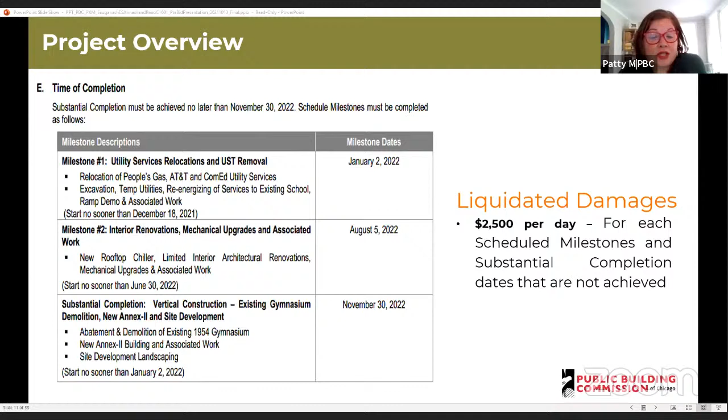The availability of the documents are on the Crossroads Print and Technologies Plan Room. The printer contact information is located here on the screen. The contact name is Christy Weber, telephone number as listed there. If anybody has any questions downloading the documents or is unable to reach Christy, please send me an email.

The assist agencies also have access to the documents and are able to assist you with viewing or downloading.

The tech review is immediately following this pre-bid at 11:30, and there is no scheduled site visit. But notwithstanding, bidders are advised that access to the school is restricted, and failure for bidders to become familiar with the project shall not relieve or alter the bidder's responsibility for completing the work.

Requests for information - I've received a number of RFIs to date on the project. Please ensure that you submit them to my attention. We are currently working on an addendum expected to be issued soon, and we want all questions in by October 19th, please, by 4:30 p.m. Please make sure that you identify the project name in the subject line or somewhere in the body of the email.

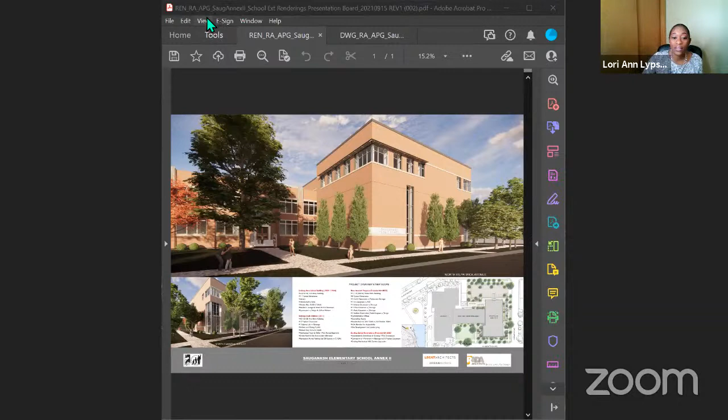Great, all right, thank you, Lori. You know, actually, sometimes I don't share the full screen because it doesn't allow me to look at my notes in this little small laptop. So I'm going to try and unfortunately keep it this way, and then we can work through the rest.

So, Kerl LaJeune, Deputy Director of Planning and Design. We've been working on this project for the last few months.

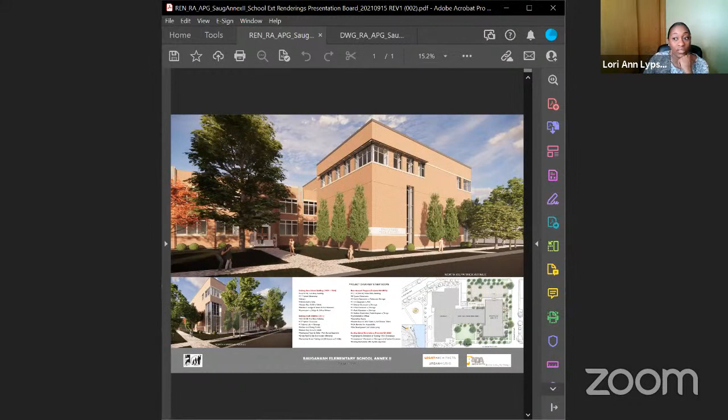I know you can't see your notes, but it's hard because we're streaming. So can you please go to the other part? If you need to go back, we can do so. We're streaming, so when you have half of a screen, it's difficult for folks to see. Is this visible? It's very hard to see. Well, that's going to be a challenge because I only have one screen. So, okay, we'll try and figure something out. I'll have to use my phone in the interim because I think my notes are there.

As mentioned, we've been working on this project for a few months. It's been very exciting knowing that this neighborhood is part of the Sauganash Historic District. It incorporates the existing school building that has been there since 1929. The site itself, the entire campus of the school, has gone through quite a bit of work since then—shortly after, in 1954, an addition was done to the north end of the existing small building. Just north of that, they added two bays to the existing school, as well as a new gymnasium, which was part of the new program.

Thereafter, in 2011, PBC, along with CPS, put in the Annex 1 addition to the south of the existing school, for additional programming, classrooms, and other specialty learning spaces. Then in 2017, south of that annex, work was done for a turf field that encompasses basically the southern portion of the site, of which our scope will not go into that zone, nor are we doing much work in the existing 2011 annex to the south.

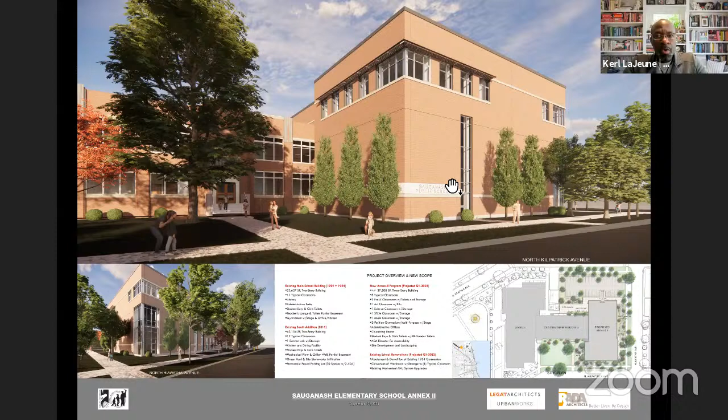It is facing Kilpatrick. There are some salvage components, like the stone Sauganash Public School sign from the existing gymnasium, that are getting relocated here. What you're seeing is a design that's sympathetic to what was done in 2011—some of the same motifs in terms of the brise-soleil, window proportions, the gymnasium, and the curtain wall are all from the 2011 addition, done really as bookends to the project.

Looking at the southeast side on the corner, you're seeing the new proposed annex to the north, the existing main building in the center, and on the southern end the 2011 addition. The field is a little bit below, south of that—that's the turf that was done as part of the project.

I'm going to step out of this for a second and focus on some highlights. It is part of the Sauganash Historic District, established in 2010. The school, however, is not on the National Register of Historic Places, considering all of the additions and other changes that have been done.

The constituents for this project have had quite a bit of community involvement. Principal Christine Munns is very active with the project and has seen quite a bit of the changes. The 39th Ward Alderman, Samantha Nugent, as well as Congressman Mike Quigley, have been involved in early parts of the project, and there is a Sauganash Community Association that acts as the LSC for the neighborhood and has been very active. So this project is on the radar of everyone, community and stakeholders, and we want to make sure we're providing this wonderful opportunity and increased growth for the school.

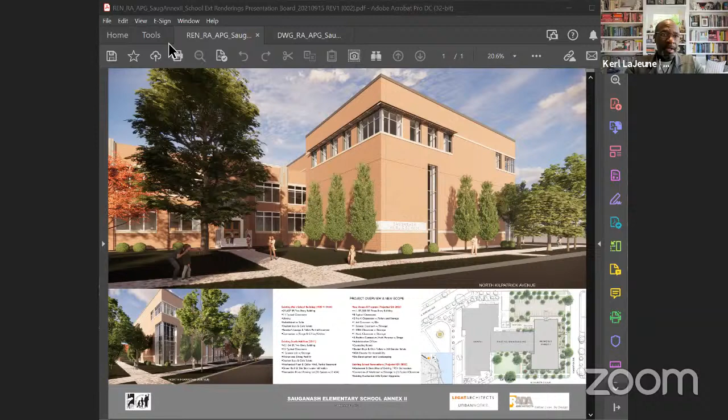I think with that, I'm going to stop there. I think the majority of the information here, understanding the scope for both the new proposed work and the impact on the existing school, are in the documents.

We have the plan schedule in order to handle the limits of construction, which encompasses the existing parking lot to the west, the location where the gymnasium to the north will be demolished, up to Hiawatha, which is the street that faces north and runs east-west, and then a portion up to the front of the building on Kilpatrick, which will be the extent of the annex abutting within the setback on Kilpatrick and the sidewalk, as you see here in the elevation.

So the construction limits are fairly clear in the documents. Coordination with the school has already been done to understand the impacts and restrictions for them as they go through the process. The phasing plan will talk about scheduling related to work inside the school building that will happen as summer critical work in order to not disrupt while school is in session. The remainder of the work on the annex goes on for the entire year until it's delivered for substantial completion.

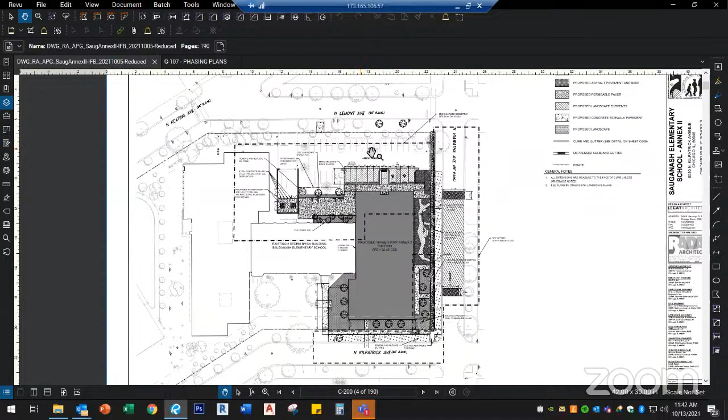All right, so special things about this site, there are two I want to highlight. One is the parking, the area in the parking lot. What we need to do is remove the existing pavers and landscape islands that are currently there, and remove the stone from the detention underneath. This is to allow the relocated electrical feeds and communications feeds to be installed underneath this area, and I'll show a detail here in a minute of what that will look like. So these feeds will go underneath the storage stone, and then after they're installed, we'll rebuild that part of the stone storage for the detention and the pavers on top with the layout that you see here.

The second part is, and I think landscape will probably go into a little more detail, but the area just to the north of the school is being called the Pollinator Garden. There's also detention storage underneath this area.

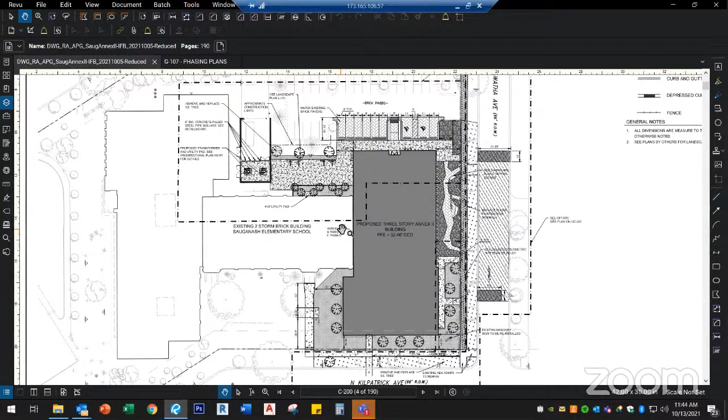I think landscape will go over the surface features. I'll show a detail in just a minute of exactly how those features work with the detention underneath. I think site-wise, that's all I had at this time. If you want to go to the next sheet, the C300 sheet.

If you go up to the parking lot area, you can see the utilities I was just talking about. These will be installed underneath that stone area, and again I'll show a detail on the next sheet.

That just shows exactly what we're thinking on that. If we go down to the south, this is a unique stormwater system, as the underground detention vault is going to be underneath the building footprint. Structural might note some different things in plumbing as well, but the storm trap vault, or detention vault, is shown underneath the building footprint. That is correct, so I know there might be some questions on that.

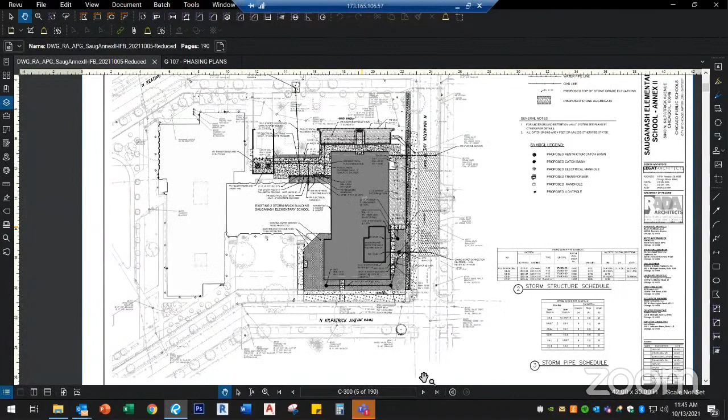I think that's it for these utilities. If you go to C600 or 601, there you go.

The detail on the left is the Pollinator Garden detail. You can see there's pavers, landscape up above, and wherever there are pavers, we've got a stone column that goes down into the stone storage area below. Then there'll be a perforated PVC under-drain to take any of that water. Now if we go to the detail on the right...

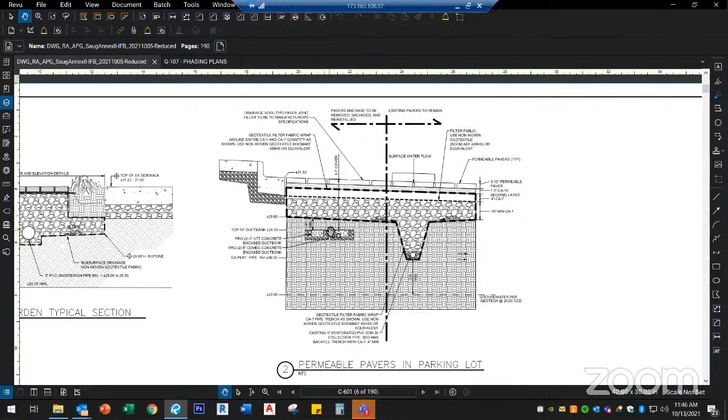The area to the left of the dashed center line is the area we're going to be disturbing. As you can see, we've got our two utility trenches underneath the stone area. Anything to the right of that dashed center line is existing to remain as is, and we are not touching that. So I think those are the special items that I had for civil.

Okay, TGDA is the landscape architect and can review the landscape highlights for the project.

Hi, this is Ben with TGDA Landscape Architecture. For the protection and removals, we are showing a number of tree removals with an X, and if the tree isn't to be removed, it's to be protected. We're showing landscape protection fence at the critical areas where trees need to be protected in their root zones.

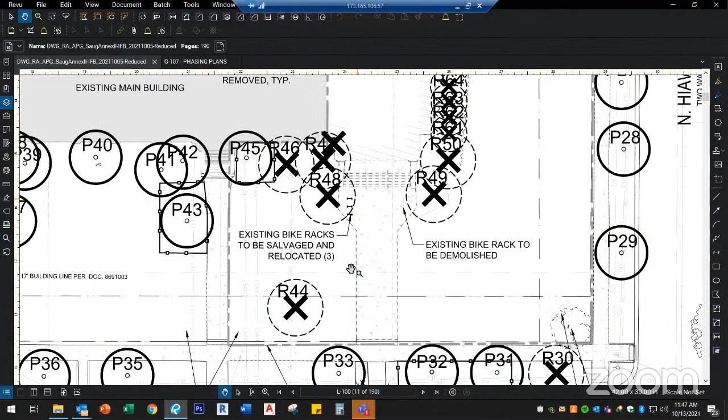One thing to note on that plan is the salvage of the boulders in the current bioswale at the parking lot and the stainless steel rail that protects that planting. Those things will be reused in the project, as well as a few bike racks at the other end of the building. So the boulders will just need to be tagged and set aside for the build out of the landscape.

For the next sheet, the plan sheet, as Andy was saying, the feature here is the Pollinator Garden, which consists of permeable pavers, landscaping, trees, perennials, shrubs, the salvaged boulders, a couple of benches, and a dry erase and chalkboard—kind of an outdoor classroom.

Then it's surrounded by fencing with a couple of openings, and there'll be two gates, one entering the property and one entering the Pollinator Garden.

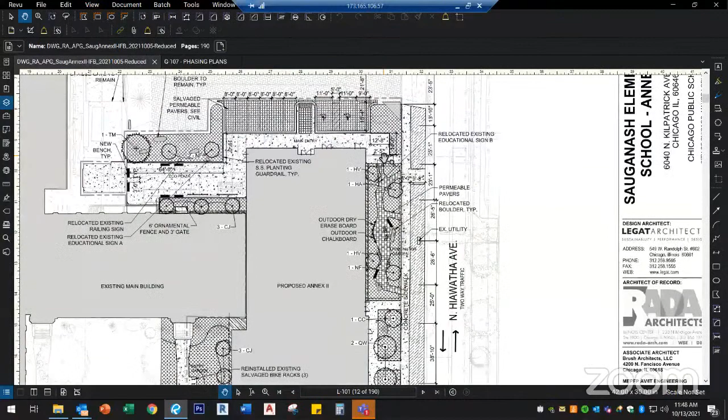Other items on this plan are tree, shrub, and feature perennial gardens, and adding in ordinance trees. Up here in the left-hand corner, we are showing this eco plaza. We will need to add some soil to the parking lot planter at the bottom end, and then replant that entire planter. Below that, along the building, there's a new planter with a 6-inch curb with a few trees, perennials, and shrubs.

I think that pretty much can wrap up the site plan. Then we have detail of the perennial layout, the soil plan, and the dimension plan for the perennial garden.

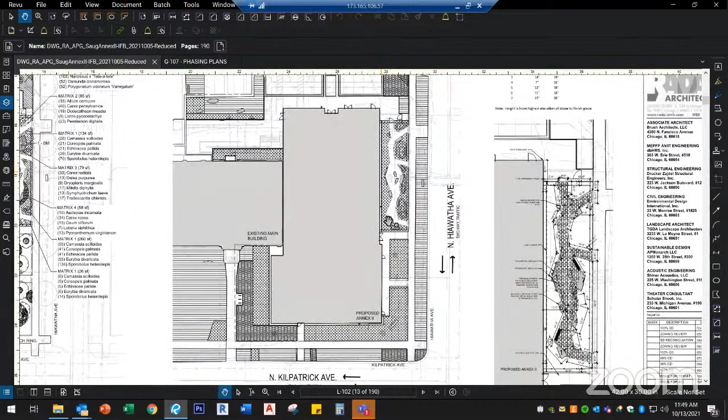The soil plan shows the depths of planting soil needed per bed, and the planting plan shows an extensive perennial layout. We intend to be on site for the perennial layout.

The dimension plan for the Pollinator Garden also shows where the salvaged boulders will be placed, on the other side of the sheet. We intend to be on site to assist with placing those boulders as well.

That's it for that sheet. Then we just have the standard details. We are salvaging material, and those details are shown, as well as new items, including the chalkboard, dry erase board detail, depths for soil, and general boulder layout detail.

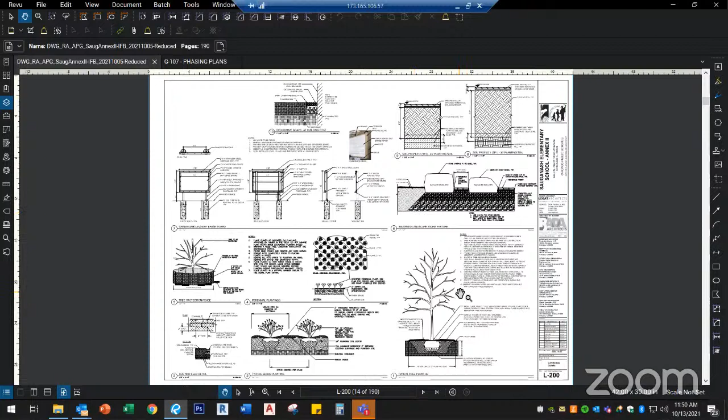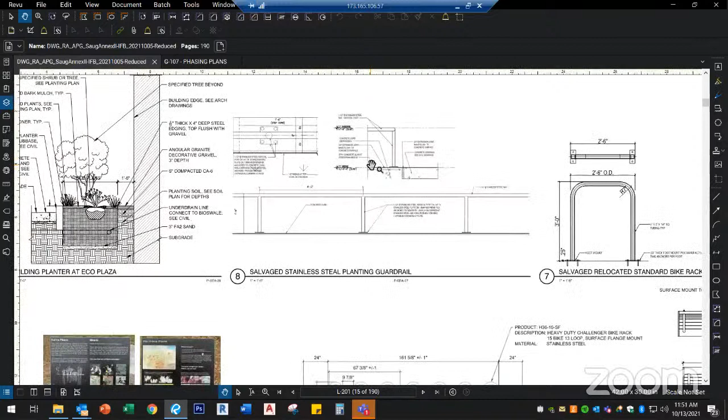So we are salvaging some signs, and that will need footings. At the top of the page, we have this salvaged stainless steel planting protection rail that will need to be reinstalled. We don't intend to weld the corners of it, but whenever it takes a turn, it needs to terminate into the ground, as that detail shows.

Okay, thanks Ben. I think that gets us through the landscape. Craig at DZSE is going to take us through the highlights of the structural.

Craig, are you with us? Is someone else able to cover Craig's portion? Is DZSE on? Yeah, Carrie Warner here from DZSE also. I'm checking with Craig, I think he just lost connection, so I can start into this if he comes back on, we'll have him continue.

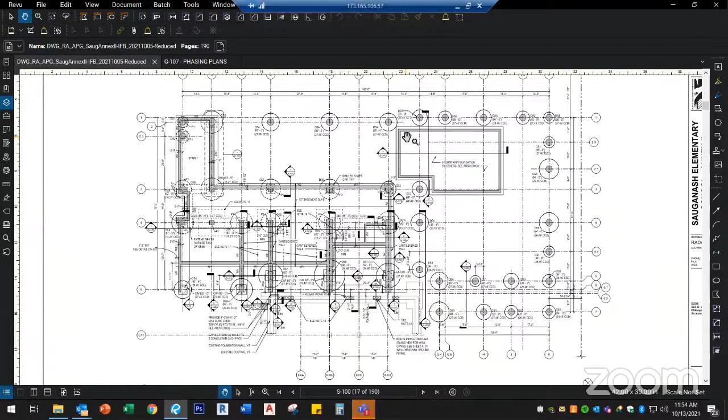So, next page. Over the basement we have a reinforced concrete structure, and then the remainder of slab on grade is structure. Then up from this we spring with a conventional steel structure with columns and select bracing and moment frames for the lateral system.

There's a joint between the two buildings; they are independent structurally, the new and the old. The new structure has composite floors, standard construction in the upper levels. All the steel structural connections are delegated. Loads are provided - unless a detail is completely detailed, it should be considered delegated and the responsibility of the steel fabricator and their connection engineer.

There's select steel detailing for the exterior wall, supporting the brick, primarily at level 3. There's a datum - you'll see the brick stacks below, and there's a hanging detail with HSS that hangs from the level 3 structure with offset angles, and the HSS provides the lateral support for the lower lintel. There's also select steel detailing for exterior wall conditions around, and then the roof has steel joists over the gymnasium.

Let's see. We have a question in the chat. The comment back is shown on C700 as completed by others, however C300 is shown within the contract - can you please clarify? I think that might be a question back to Civil. I could pause.

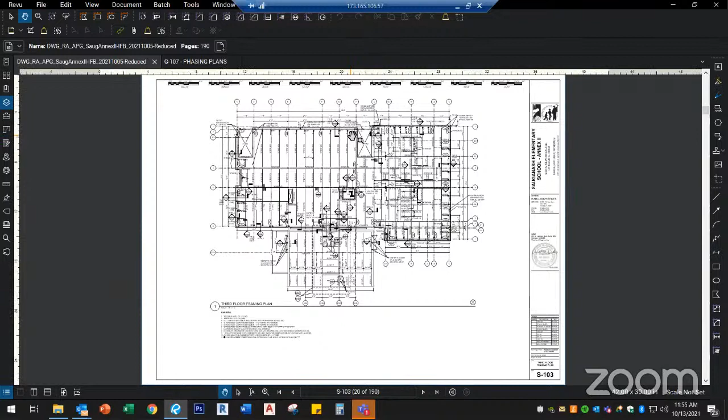I'm sorry, can you repeat the question? Sure - the comment duct back is shown on C700 as completed by others, however C300 is shown as within the contract, can you please clarify? It is within the contract. C700 will - I did not get that line of text updated.

Okay Patty, let's make sure we add that to our RFI so we can clarify as well. Sorry to interrupt. That's okay, this is Carrie at DZSE. Should I pick back up?

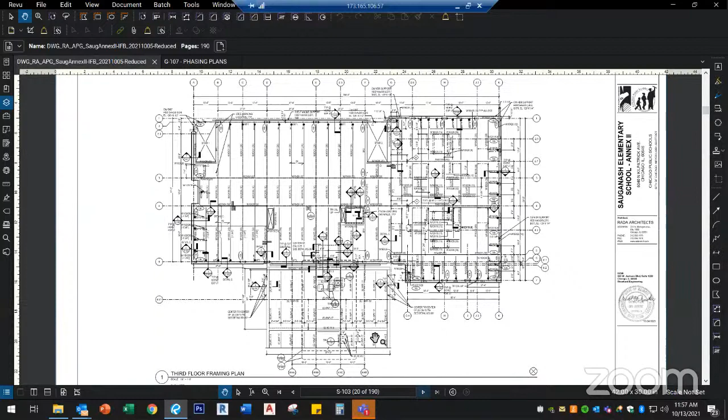Yeah, okay. So for the remainder of the work there's some other nuances you'll see in the drawings. At the gymnasium there's some thickened slabs over the storm trap, but the structure of the storm trap itself supports the slab on grade structure of the gym. In the existing buildings you'll see there are several new lintels, and there's a chiller up on the roof that has a steel structure and a screen with provided detailing to sit primarily on the edge parapet walls and the interior columns, so that most of the structure is supported column to column. That's a general overview of the structure and the highlights.

Yeah, here's - hi Carrie.

Go ahead, Greg Craig with DZSE. Hey, sorry, I was muted and I couldn't get through. I think Carrie did a great job of covering for me. Carrie, if you want to keep going, be my guest, or I can take over if you'd like. I think we got it all, Craig. We went over the list you had already compiled with everything. So someone can put in the chat if there's any questions. Took me some time to figure it out.

I think it would be good to really pay attention to the chiller support. We have a chiller being supported off the load-bearing walls and specific structural connections at the 1950s era building. So we have very specific details that should be reviewed carefully by the contractors. The chiller also has a screen wall around it to shield the visual impact to the neighborhood, and that has its own framing system as well.

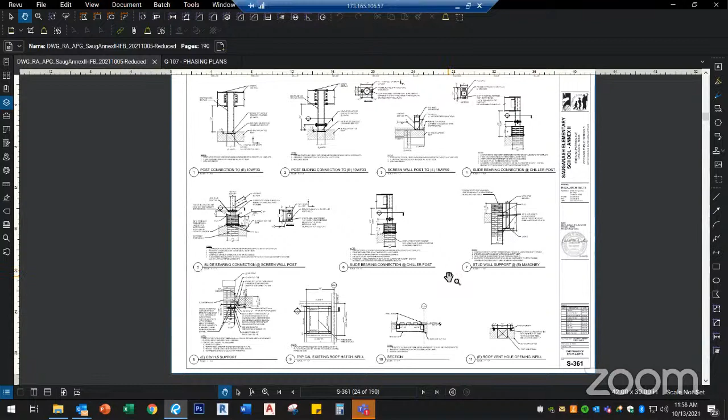In the 1950s building, we have a classroom being created out of an area that was a small office. We're extending an opening to make the new opening large enough for a typical window bay from the 1950s design. That will require a new lintel to span the load-bearing areas of the building there, so that should be reviewed carefully by the team as well.

Okay, so we're into the architectural review. Andy did a good job reviewing the site conditions. I'll just say the existing gymnasium is roughly half the size of the new annex, or even less in footprint. So the new annex is going to take up a large area of the site, and the site is not huge for staging materials and so forth, so it should be looked at from the contractor's point of view on that aspect.

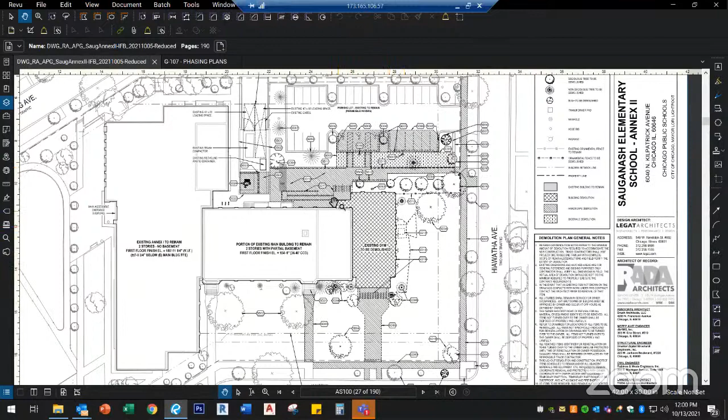We have an exterior ramp that will be demolished as part of the first phase, which is the utility relocation. There's also a small vestibule area of the 1950s building that will be demolished along with the gym. The underground storage tank is shown roughly in its location, and you can see our existing masonry trash enclosure that also includes the transformer enclosure. All of this plays a big role in the utility relocation milestone at the end of December, and Andy touched on the fact that we're demolishing a portion of the parking lot to facilitate that work.

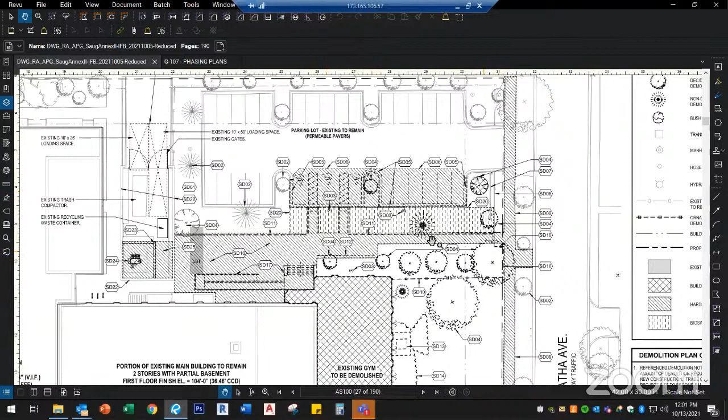The intent is to remove the minimal amount of parking lot as possible in order to get the utilities relocated, so we can keep power, gas, and communications to the main building operational while we're doing the new annex. The complexity is there's a transformer currently feeding the main building of the school right here. This transformer needs to be gone before we can demolish the gym, so we need to relocate it and put a new transformer in a new location.

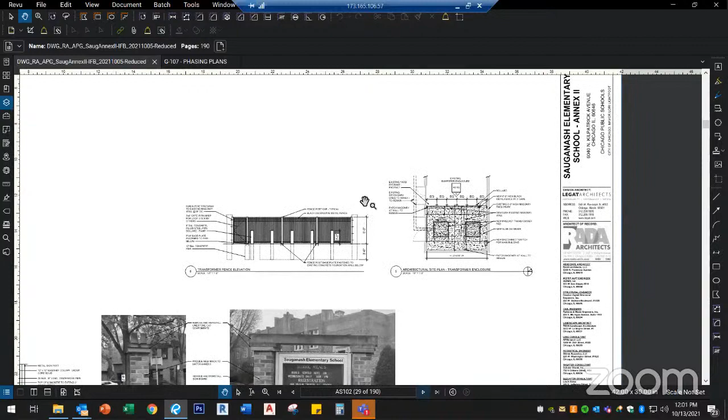The new site plan has been discussed, but you can see here where the two transformers are going to live after we're done with the first milestone. For demolition, this plan shows the existing vestibule on the main level of the 1950s era school that is going to be removed, and this existing small office or classroom area that is going to be expanded to create a new typical CPS classroom.

The highlights of the lower level plan: this project is a little unique as it has a basement, a partial basement. We have an elevator, but it does not come down to the basement—it stops above, so the elevator pit is actually higher than the basement elevation. The basement has the electrical room, fire pump room, and mechanical spaces. The stormwater detention vault that Andy touched on is within the footprint of the building, and we have unexcavated areas or slab-on-grade areas around it.

The other main component is we are backfeeding the main building air handling unit with utilities from the new building. Ben will touch on it more on the MEP side, but we have pipes and infrastructure coming from the new annex, through a crawl space, into the mechanical and basement area of the existing 1920s building, to a refurbished air handling unit. So this is twofold from a mechanical point of view.

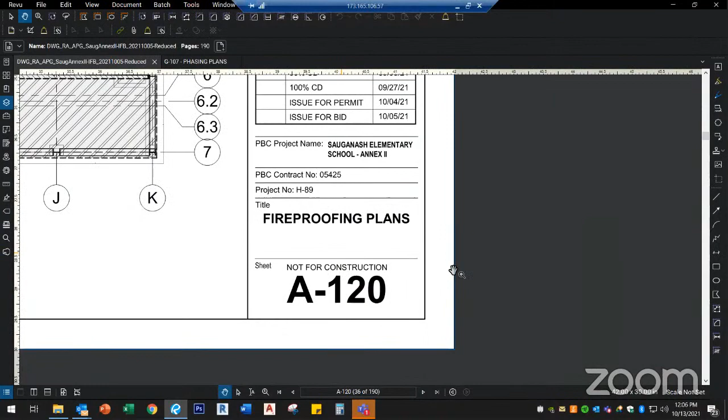This is a sheet we created that is a fireproofing plan. It's important for the contractors to review this in detail. It gets into how the 4-hour rating extends further than just the little link area, incorporating the structure and connections that support all of that.

There was a small change in the addendum that will come out showing the ratings in the gymnatorium have to be 2-hour rated, not 1-hour rated. That will be picked up in the forthcoming addendum. So the gymnatorium has a special rating.

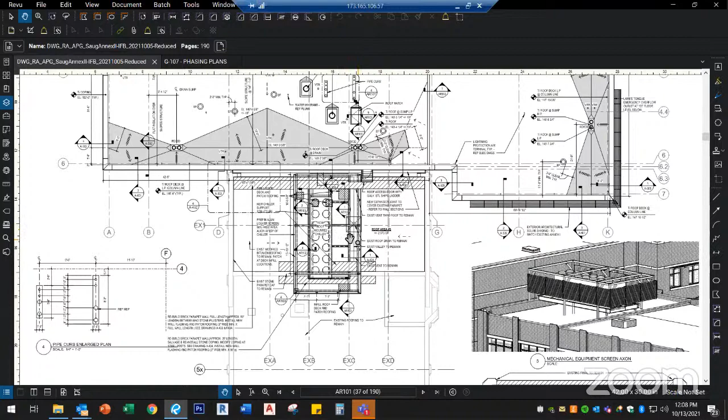The roof plan gets into how this chiller is going to work on top of the 1950s era building. It essentially bears on the load-bearing wall at both the south wall and the north wall, and also comes down to the roof in a few locations to connect to the structure below. So there'll be roof patching and structural connections to the structure of the 1950s building below it.

The rest of the roof of Annex 2 is pretty straightforward and what you would typically see on a roof of this building. Ceiling plans are also pretty straightforward in terms of what you'd typically see on a CPS project.

Important items to note on the elevations: we are salvaging this sign from the existing gymnasium that's being demolished. We do have curtain walls on this project, which is different than many CPS projects. The curtain wall uses basically the same language as the 2010 Annex 1 project, so we have curtain wall detailing and sunshades integrated into the window systems that mimic Annex 1.

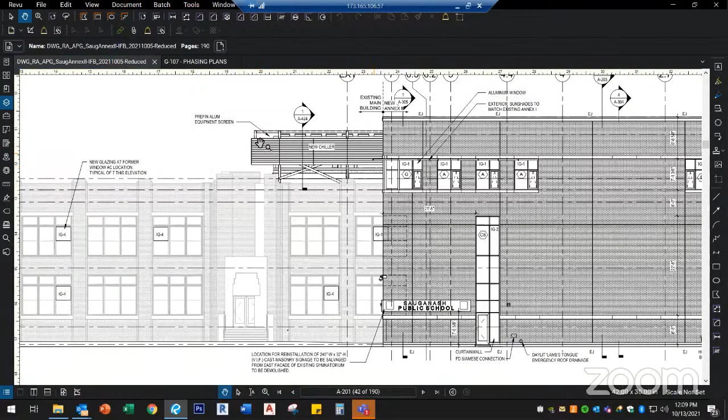The chiller and the chiller screen should be reviewed in detail as well.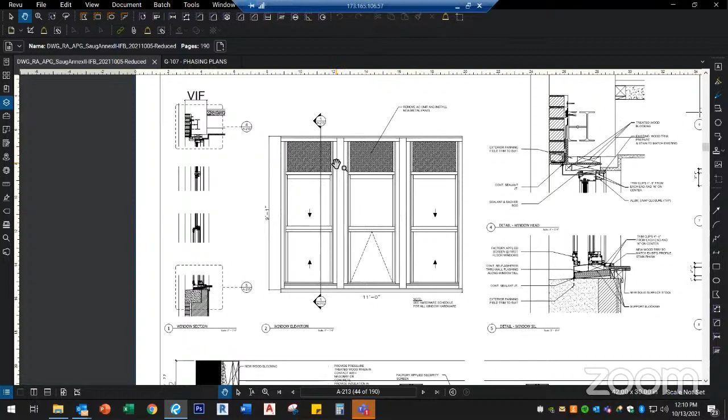On sheet 213, I want to touch on the fact that we have one new window bay from the 1950s era building that we need to recreate. Those windows will be double hungs with a fixed unit over an awning. The awning gives the accessible window, and the double hungs match the 1950s and 1920s era buildings. We also have panels above that in order to match the existing building's look. So there's one unique condition here where we're trying to match the existing building—the rest of the windows are new construction with their own language. You'll have to review this in detail to see how we're creating blocking and so forth to mimic those window divisions that currently exist on a window opening that doesn't currently exist.

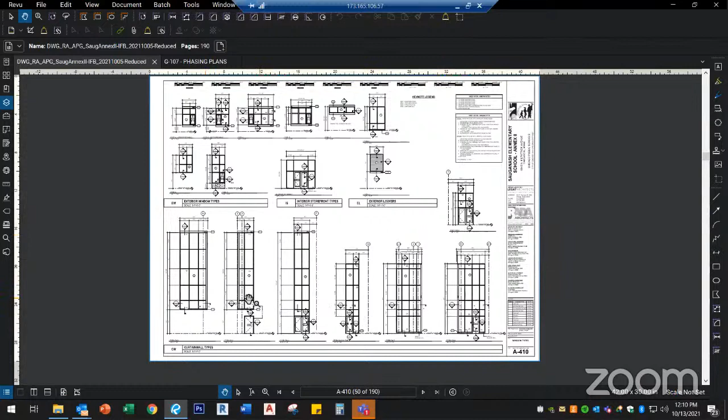I'm not going to go through all the wall sections—there are lots of different components and so forth—but keep in mind we have a curtain wall system that you may not be used to seeing on a lot of the Annex projects.

Our typical windows are an awning with an operable awning window and then fixed windows. The operable windows need to meet the ADA requirements.

And I want to touch on this sunshade that is mimicking the Annex 1 sunshade.

I do want to touch on this detail. This is our very typical base detail for the building. So we have exterior insulation that is coming up to the top of the first floor slab and is being protected by a stainless steel cap. And this is all for energy code requirements.

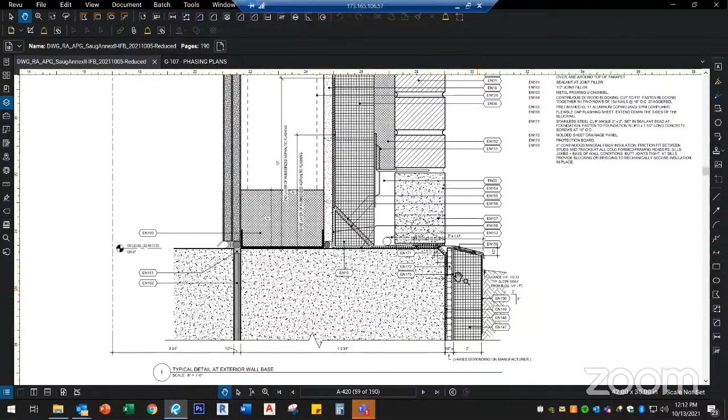So this may be something that you're not used to seeing on the buildings, but this is kind of a new requirement that we're working through. On the parapet detail, we have a limestone cap and a pre-engineered or pre-manufactured metal coping around it.

And I'll touch on the chiller support again and this connection between the 1950s building and the new annex. We have a firewall with CMU. We have the existing parapet wall of the 1950s building with a chiller support steel grillage coming down on it, and this is all an expansion joint between the two buildings and how that's created.

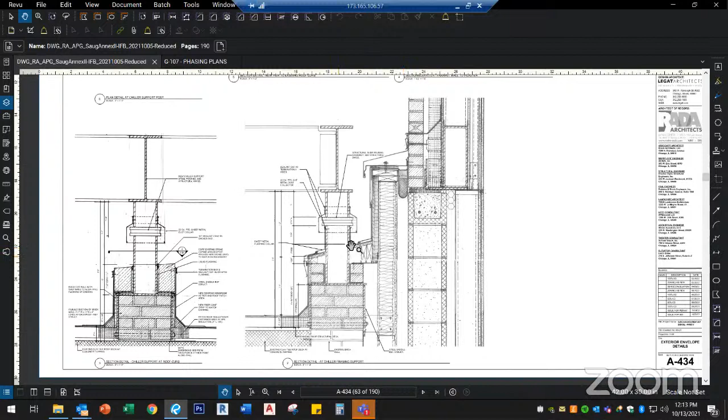So this is where it gets maybe the most complicated in terms of detailing, so these are kind of important to review. The 500 series is going to show the enlarged plans of all of the classrooms and support spaces for the buildings, and this is things that you'll be kind of used to seeing in bidding on Annex projects.

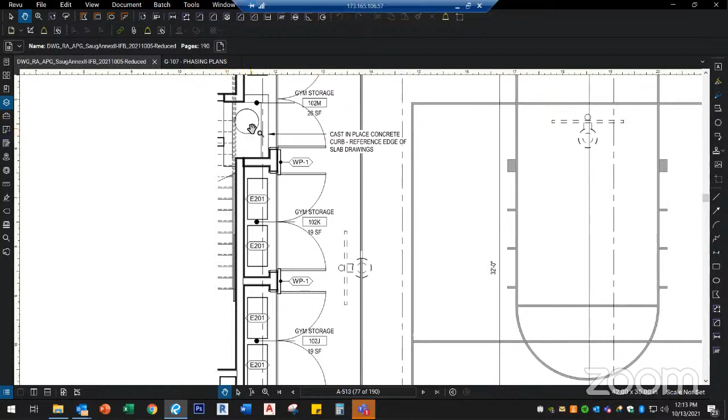I will touch on the Gymnatorium quickly. There's a stage with a stage lift, telescoping bleachers. We have some storage spaces, but we also have this connection here. This is how you access the stormwater detention vault. So there is a lid here that would be like a manhole. It is a manhole cover that would be removable so that one can get down into the stormwater tank if needed.

The stair detailing, we are matching the stair details of the 2010 Annex. So the railings and the way that the stair is set back from the curtain wall, all is with the intent to match that building. So it's a little bit unique on this project.

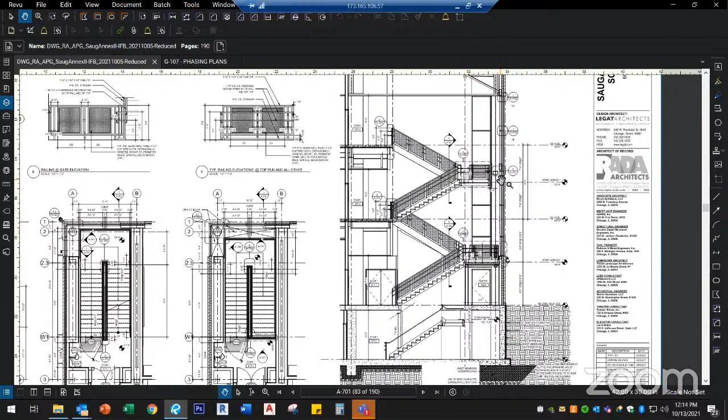And the elevator, as I mentioned, does not go to the basement. You can see the basement level and you can see where the pit stops. So that's all been drawn.

There are theater drawings to be aware of, rigging systems to support all of the stage curtains and so forth, and lighting within the stage area itself. And there's lighting in the Gymnatorium side for theatrical lighting that's specified. All of that's in the specifications for what that lighting is.

And that gets us kind of through the architectural side. So I'll turn this over to Ben to go over the MEP side.

Ben, just let me know what sheets you want to. Yeah, sure thing, you got it. I've got a couple team members who will join me and help out here.

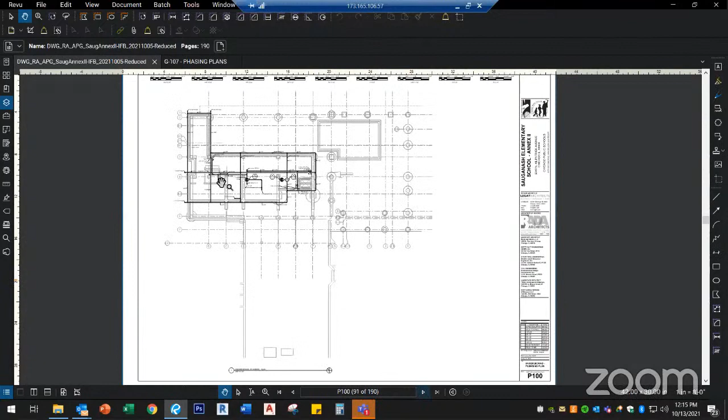But I think we can advance into the underground drawings. So the building has a drain tile system for the addition. And if you advance forward, we have 10-inch storm sewer and 6-inch building sewer. If you can advance the slide or the sheet around.

Yeah, so here we see the sewers proceeding out of the northeast, the new combined 8-inch domestic water and fire protection service, sump pumps and sewage ejectors.

And you can advance to the first floor, where you'll see separation between domestic water and fire protection, 500 GPM fire pump, which we'll get to later. And water proceeding to domestic hot water heaters and bathroom fixture groups.

We can move up the building. There's not a lot of distributed plumbing fixtures for specialty uses. There are a few unique classroom areas. The art room, sinks with traps. On the third level, we do have the maker space with some unique requirements. This is a newer type of classroom, so do see that, as well as the science classroom.

I think we can advance fire protection maybe next. Enlarged plans in the 300 series, everything's pretty well detailed and straightforward here.

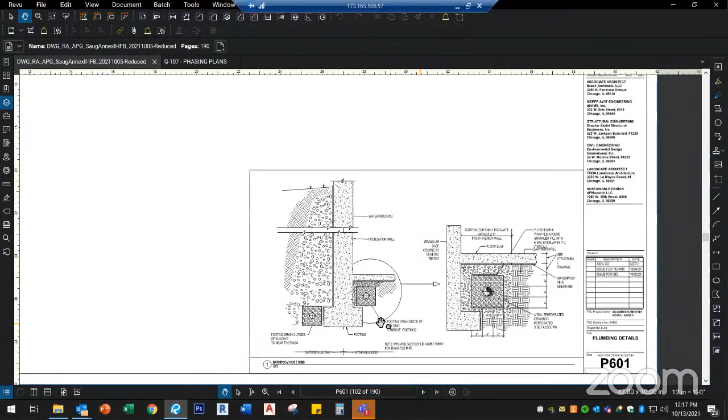Not much to say about the drain tile system. It's pretty straightforward. There are some unique conditions at the separation between the existing building and the new.

Mechanical is a new system with an air-cooled chiller we've talked about already, and hot water boilers, serving both the new annex and a portion of the original building. I'd like Syed to walk us through the mechanical drawings and point out some of the unique design details for the project, please.

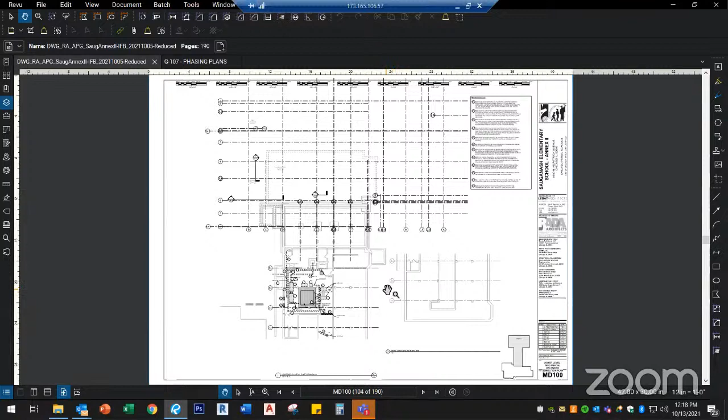This is Syed Ahmad. This is the plan showing the demolition of the existing mechanical system. Basically, the existing building is served by 2 boilers and an existing air handler. Those 2 boilers are coming out, including all the steam piping and condensate piping related to them. We are also upgrading the existing air handler, shown in the big shaded box.

That's basically an older version of the fan system, and we are replacing it with a state-of-the-art new fan array system. Also, this existing building is heated only, so we are adding a cooling and heating coil to that air handler as well.

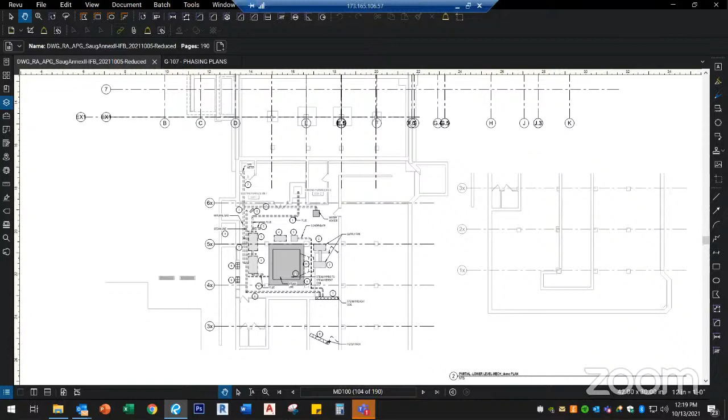Once the boilers are removed, we are sizing the new boilers, which will be located in the new building and will backfeed the existing building. We'll show you in the following slides the scope of work in more detail.

Also, in the existing building, since we are upgrading the fan system, we are also asking you guys to balance each classroom. We are not changing anything in the classroom, we're just asking for you to balance the existing classroom so that they meet code.

Next slide, please. So there are first and second floor. In the attic area, as part of the upgrade of the existing fan system, we are also adding a return fan in the attic, which will be connected to that fan system located in the basement. So this is what we are showing here.

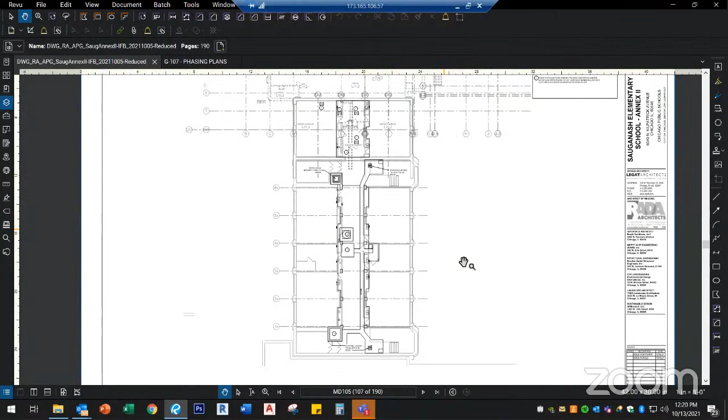This is the new sheets. Basically, at the bottom, we are showing the new upgraded fan system in the existing building. We have developed some sections and elevations to describe the scope a bit, because this is an existing building, and it's kind of a congested area. We need to make sure you look at this existing fan system and understand exactly what is involved and what we are trying to show here.

But basically, we are upgrading the existing fan system, adding a new fan, new coils and controls for the existing fan system. And then, like I said before, we are going to be backfeeding the existing air handling unit from the new Annex building. Next.

So the new boilers we are putting in are going into the basement area here. There are 2 high efficiency condensing boilers, sized not only for the Annex but also for the existing building. We are showing all the pumps and related accessories here in the basement area.

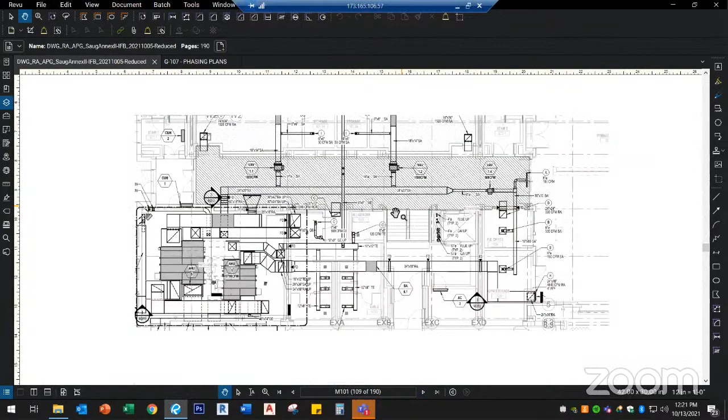Next sheet, please. So next, like Aram said, this is a big mechanical room where we'll be putting 2 new air handlers. One air handler to the right will serve the gymnasium, and the one on the left, the larger air handler unit, is going to be taking care of this 3-story academic wing, Annex 2.

This is basically a VAV system with hot water reheat, and we'll be using the boiler for reheat and heating purposes. The building will be getting cooling from the chiller. Aram and Ben both described where the chiller is located, and we'll be routing piping from the chiller down into the chase to feed these air handlers and also the air handler in the existing building.

So the classroom layout is pretty similar, pretty straightforward, like we do all the CPS schools. Each classroom will get 1 VAV box with supply diffusers. It will have its own thermostat to control the zones, so each classroom basically becomes an independent zone. So this is what we are showing here, which is pretty straightforward.

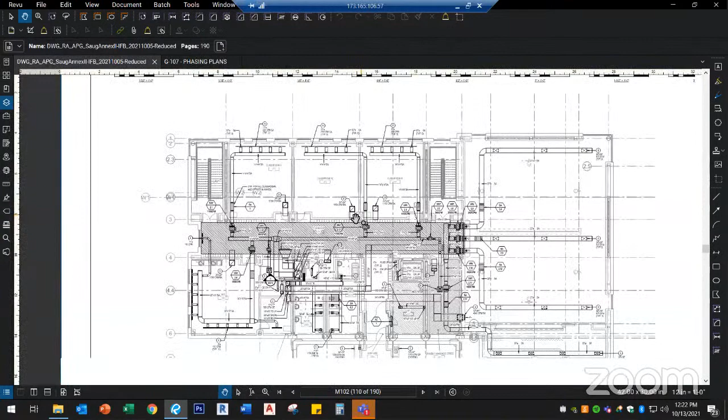And the gymnasium, obviously, will also be served by a few VAV boxes from that 1 air handling unit, like I described before, and the boxes are located in the hallway of this second floor for better service and accessibility.

This is the third floor space. You can see it's similar to the first and second floor. The third floor is also being served the same way, with each classroom having its own zone. Now you can see the chiller on the existing roof, shown as a big long rectangular box there.

This is a roof plan, basically showing all the exhaust fans and flues and

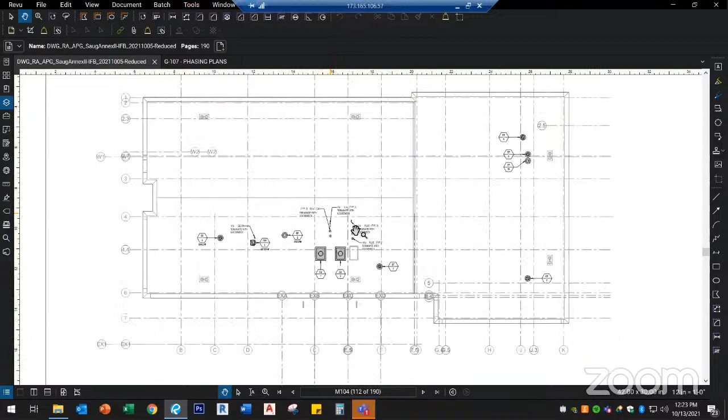condensing units for the IDF or MDF rooms. This is the fan I was talking about before. A new fan is being added in the existing attic building as part of the upgrade of the fan system.

So let me talk about the attic a little bit. The existing attic is being upgraded to a ducted return system, and there will be work that has to be done above the ceiling.

On the architectural drawings, we've noted that the contractor needs to provide shoring to facilitate the work above, to shore the existing plaster and metal framing system, to support the work happening on the corridor side of the main building above. We've asked that the ceiling be completely repainted after construction above is complete.

And we'll have some areas of square footage to allow for plaster patching and restoration. It's important for the contractors to understand that they need to facilitate this work in the attic. It is a lath and plaster system with metal framing from the 1920s and 1950s.

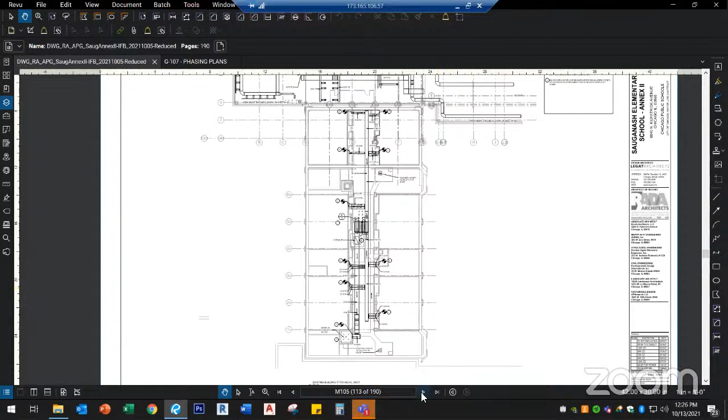Okay, so far you have seen the duct plans. These next few sheets will show you the piping plan, basically showing the same thing, but these drawings will show the piping layout.

So basically here we are showing the piping that's backfitting the existing fan system that is being upgraded, routed through the crawl space.

There's a lot of stuff in the crawl space, existing ductwork, existing piping, but this is the best route we could find to route the piping from the new annex to the existing building.

So chill water, hot water, and gas piping will be served. There's a new gas meter going outside here.

And then we are going to drop piping in this existing closet and feed the new boilers and also the existing water heater. There's an existing water heater in the existing original building, and that gas will also feed that.

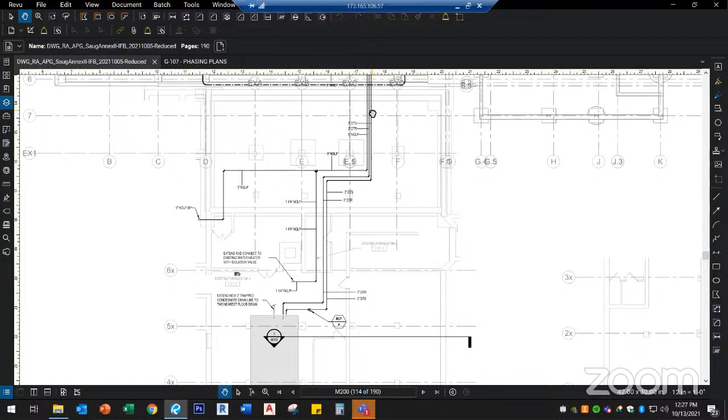There's nothing else that requires gas in the existing building.

Next sheet, please. Again, the first floor - this is the piping showing the layout from the riser into the air handlers, feeding the two air handlers and all the VAV boxes in this portion of the building.

Here there is no chill water, it's just hot water piping that is being routed to feed the VAV boxes and some of the heaters, especially in the vestibules and stuff like that.

Now here you can see the chiller on the roof of the existing building and the piping from the chiller going into the new annex and dropping down to the pumps and also to the other

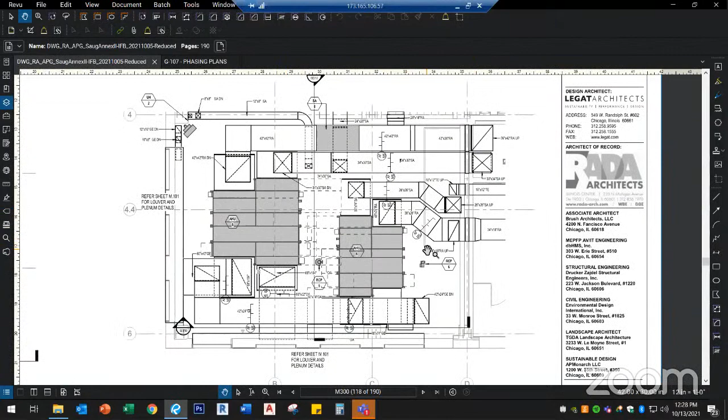air handling units. This is basically a blow-up of the mechanical room, showing the air handlers and how the ductwork is routed, and piping is routed from the mechanical room to the other parts of the building.

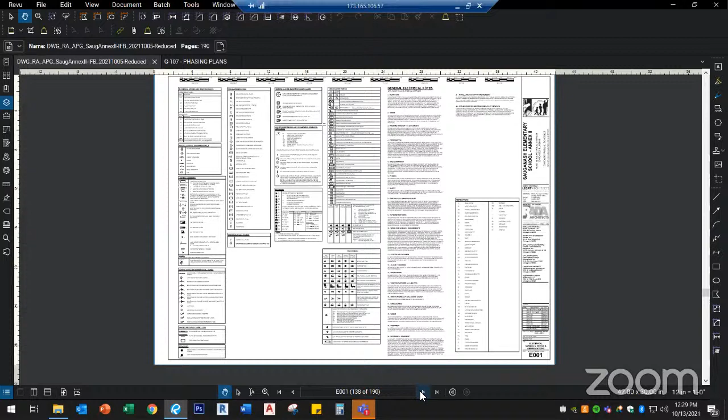I'd like to start with the site plan. Aram had hit on a couple of the important early elements of this project. We have a new, I want to say 2,500 amp service, but also the removal of this transformer, and then our 2 new transformers, which will be on the west-northwest side of the existing building. Sydney or Sherman, is there anything else you want to say about the site plan?

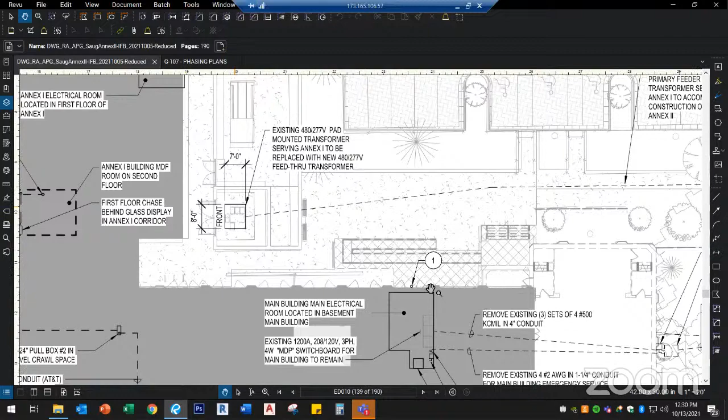At the location of the existing 480 volt 277 transformer, that is being replaced. So this existing 480/277 volt transformer serving Annex 1 is planning to be replaced with a new feed-through type transformer, and will refeed Annex 1. If we can go to the new work site plan, it will then feed the new 208/120 volt transformer that will be refeeding the existing building and the new annex.

Thanks, Sydney. So this plan also has new data connections addressed on it. You'll see some security cameras located on the plan as well. I think from there we can advance into the building sheets.

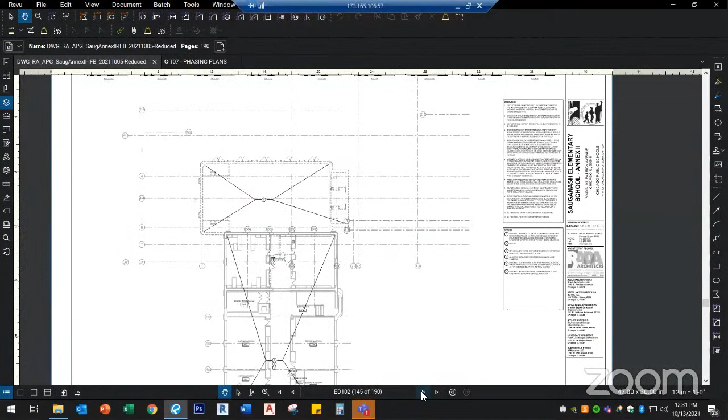So this is a power plan for equipment. Sydney, we have some limited work in the existing building. Could you tell us about that? I think we just skipped past those sheets. There we go.

Yes, if we could go back to the demo, the basement demo plan. Currently, the emergency lighting in the existing building is being fed from a second service from ComEd. We will be removing that second service and replacing the emergency lighting with emergency battery packs within the existing building. Because of that, we are removing some of the infrastructure, including the existing ComEd meter, disconnects, and ATS.

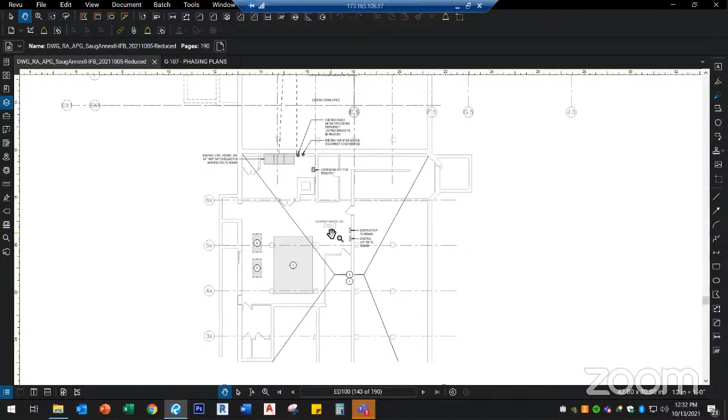Fantastic. If we move forward into some of the new work sheets, I think some important areas to highlight, Sydney, is the Gymnatorium in the new work. Stop me if I'm skipping anything you wanted to talk about more. But there's very important coordination within this area.

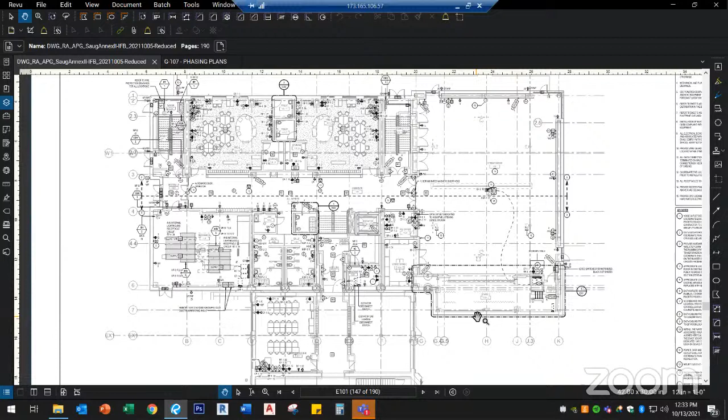Aram has elevations on his sheets, not only for the Gymnatorium, but also for classrooms which have special outlet requirements, whether it be the pre-K and coordination with the casework. Sydney or Sherman, am I missing anything important on this sheet? We're good to continue.

So in a lot of these classrooms, whether it be a teaching wall or a feature wall, the data and power requirements on the drawings are diagrammatic only. So that's why I stress you really have to reference the elevations as well. That kind of coordination becomes very important, whether it be entry coordination or also with mechanical for thermostat locations and other wall mounted devices, to get a nice clean installation.

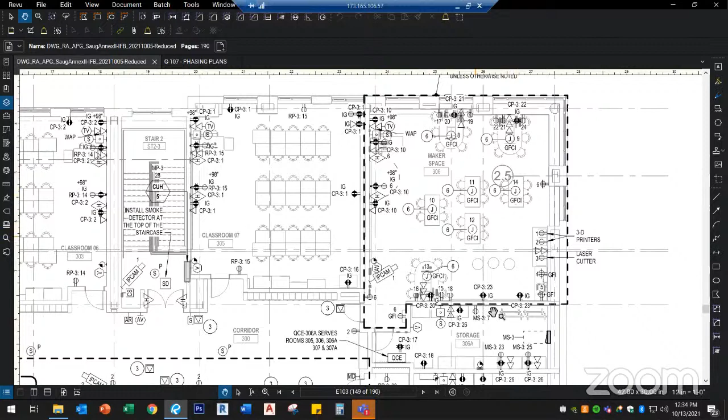The maker space is an important one, again, unique. Sydney, can you tell us about some of the equipment connection requirements here? Yes, in the makerspace, we have our typical teaching wall, but in addition to that, we will have cord reels at all of the workstations, as well as power connections for 3D printers, laser cutters, and robotic arms.

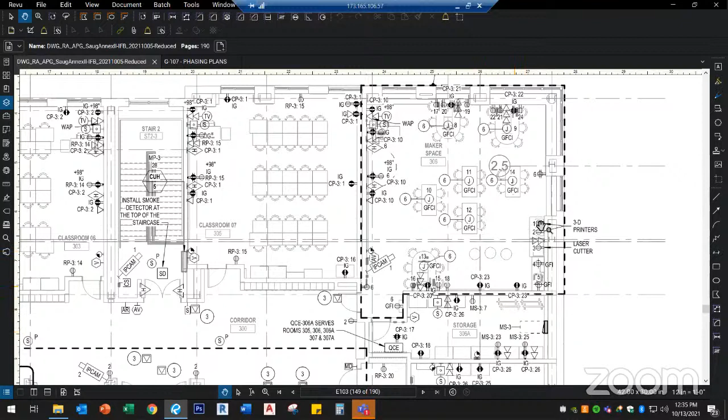Similarly, we're actually putting infrastructure in the storage room for the 3D printers so that they can operate independently of being in the classrooms. That was a request, so this maker space is a little bit unique. It's kind of a hybrid between a physical and a digital maker space, so we're trying to make this space as flexible as possible. You may see exhausts in the storage room that you might not normally see, related to 3D printers that may be moved in and out of these spaces.

I think we can advance on from these sheets, just a power roof plan. And if we keep moving forward, I don't think we need to pause very long on the lighting sheets. There's lightning protection shown here, so we do have lightning protection.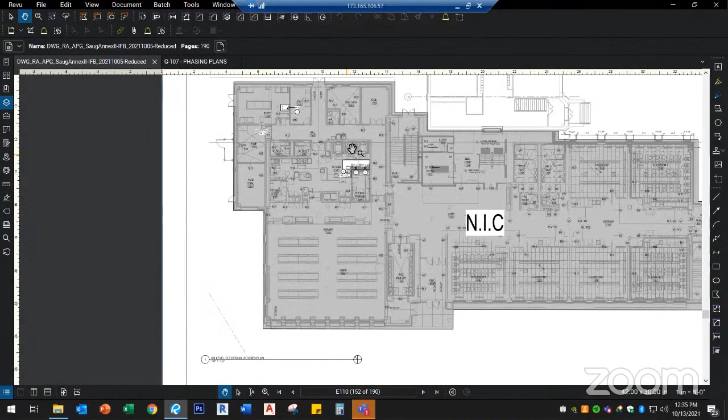That's the kitchen work I think we're showing here, right, Sydney? Yes, this is the additional equipment that will be provided in the existing kitchen within Annex 1. And some panel work, relocation of the panel.

On lighting, these plans are designed around standard fixtures, and we have CPS lighting standards we're trying to hit. So in the RCP, coordination is very important in phasing and coordinating that work with sprinklers and everything else happening with those ceilings. We haven't talked much about the LEED requirements of this project, but we're also targeting lighting efficiency levels and control of these systems.

Please be aware that when addendums come out, if light fixtures are changing, pick up those revisions, as there have been some late changes to some of the light fixtures in the corridor, specifically some pendant fixtures that are being changed. Pay attention to the addendums in detail when it comes to anything related to fixture types.

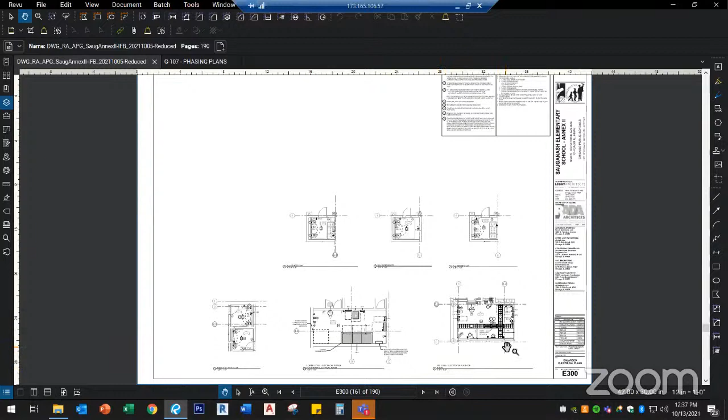We can skip past the lighting, I believe. We have this MDF room down there in the corner. We have details there for the requirements for technology and infrastructure, lattice tray system layout. These should all be very straightforward.

I'd like to advance to the riser diagram, and some of the things pointed out about the unique service rework are clear from that riser diagram. This is a little bit of a repetition, but it doesn't hurt because it's a unique and phased approach. Can you walk us through that one more time? Yes, so again, we are providing a new 480-277 feed through transformer that will be feeding Annex 1 as well as the fire pump in Annex 1.

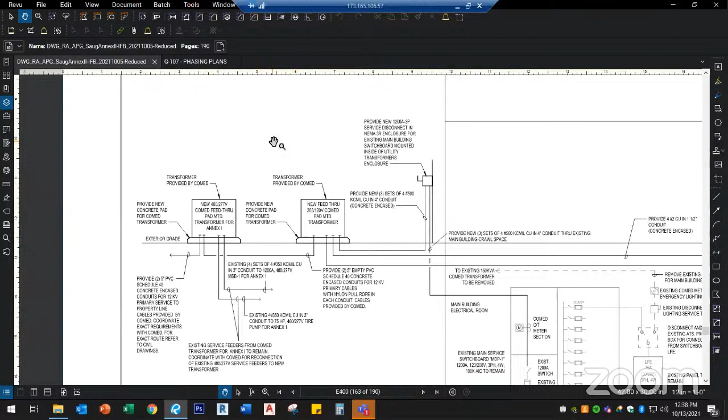That will feed through to the new 208/120 volt ComEd transformer, and then that will feed both the existing main building and the new annex. We have a 1200 amp exterior disconnect switch, service disconnect switch, that will then feed the main switchboard in the existing building. And as mentioned, we are also calling for the removal of the existing emergency lighting service in the basement of the main building.

Distribution in the new annex, we have an isolation transformer, which is feeding the computer panel, distribution panel, which will then feed all of the computer receptacles throughout each floor, as well as receptacle panels, lighting panels on each floor, and mechanical.

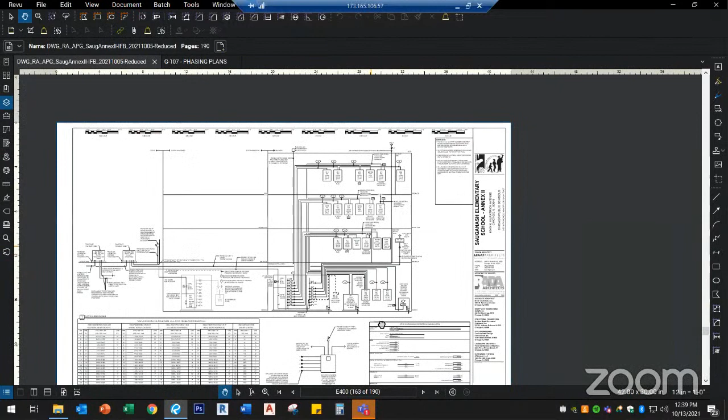Maybe the next place to stop would be the fire alarm diagram, a couple sheets ahead here on E420. So the fire alarm, we are calling for an upgrade to the existing fire alarm panel located in the existing main building. We will then feed all of the new devices in the new Annex 2 from this panel.

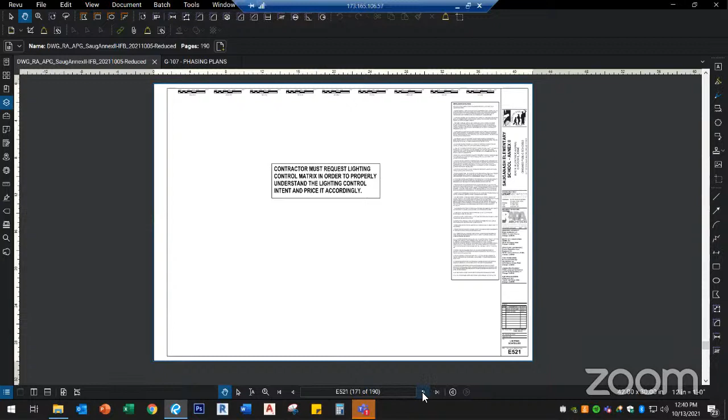It's important in your bids to note that location and the conduit runs from the existing to the new. I think that pretty well covers it. We're really into details now at this point, particularly technology details. I don't think there's anything critical on these to cover.

On the technology, Sherman had to drop off, but I would note there is again some interface between the existing buildings and the new. Pay careful attention to that for conduit pathways and work within the existing building.

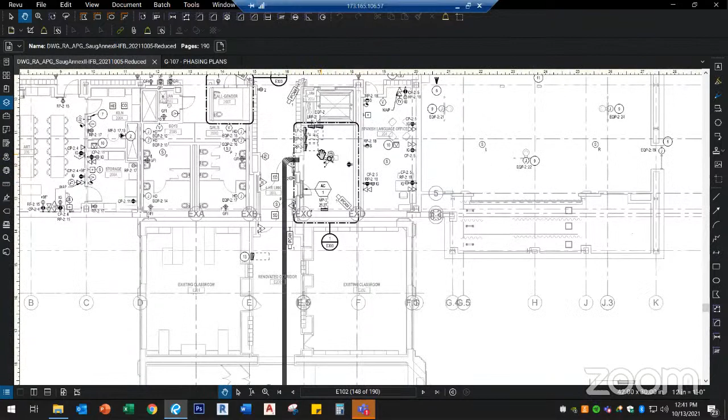The IDF room for Annex 2 is on the second floor, and the idea is we are connecting the IDF room to an MDF room in Annex 1. There's conduit that is going to be running in the attic space where we're doing the work for the new ducted returns. That conduit will run in the attic all the way through the existing main building, and then it will pick up to the Annex 1 MDF room. There's information in the drawings on that, but there's quite a bit of conduit runs to make that work.

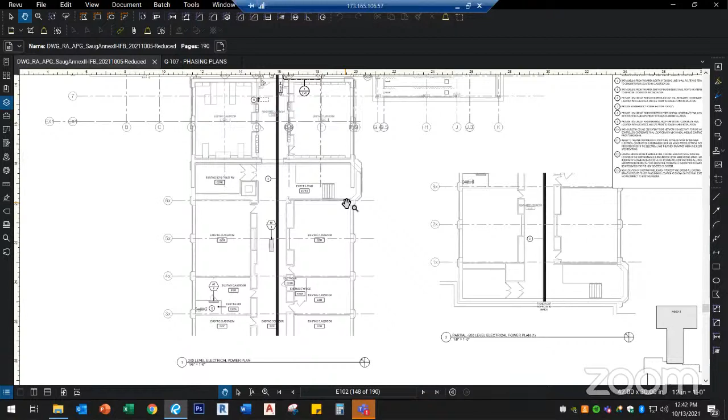We also have to take a conduit to the existing office where some of the door intercom system and other systems are located.

We are providing infrastructure for future PV arrays, so it's really just empty conduit coming from the panels. There are considerations for what might be built in the future for PVs on the roof, which are currently not at all a part of the project, but just the conduit is.

Okay, I think that gets us through the technical reviews with the different disciplines.

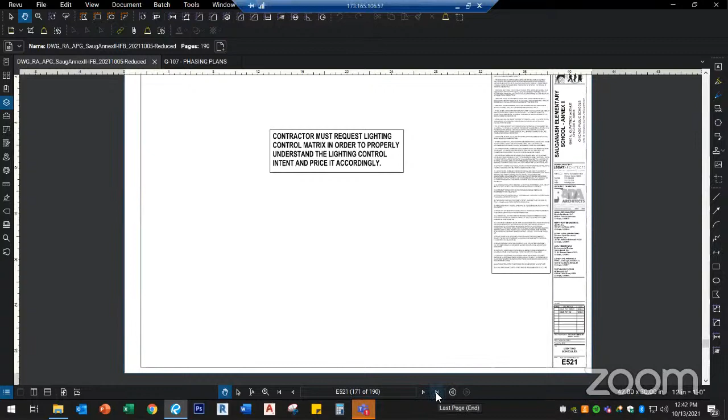We had fire protection around. There's not a lot to say here. We could go just to the riser diagram. It's very straightforward.

Again, the coordination of the RCP is important here for the fire protection contractor to coordinate with the rest of the team. That's all I had to say on the fire protection.

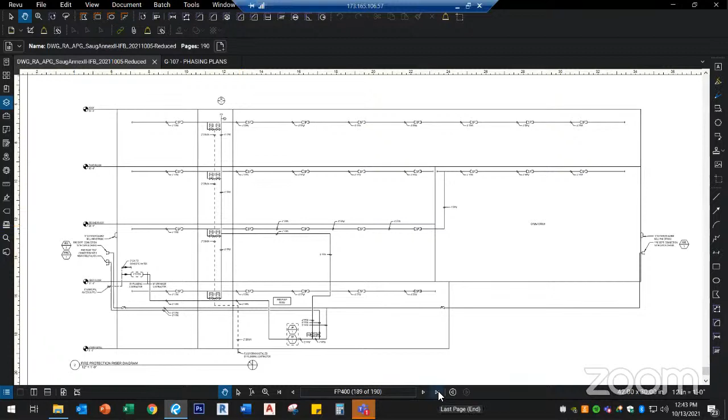As Ben mentioned, this is a LEED project. We're targeting LEED Silver, and there's a lot of information in the specifications, and there's a LEED scorecard that shows the design team's attempt to understand anticipated points. So please be aware.

Okay, thank you. PBC team, are we going to review the phasing plan? Yes, if we may review the phasing plan quickly. Jeff Strauss, our senior PM, will briefly go through that. Ron, can you put up page G107, please?

So for this project, we have 2 milestones, milestone 1, milestone 2, and a substantial completion. As Ron was pulling up G107, we will go over this very briefly. Keep in mind, this is an extremely important document. Please pay attention to everything on this page because time is of the essence.

The site utility relocation is going to be from December 18th, must be done by January 2nd. I'm going to repeat that. All work for site utility relocation must be done by January 2nd, 2022. We need to do the utility relocations prior to demolishing the gymnasium.

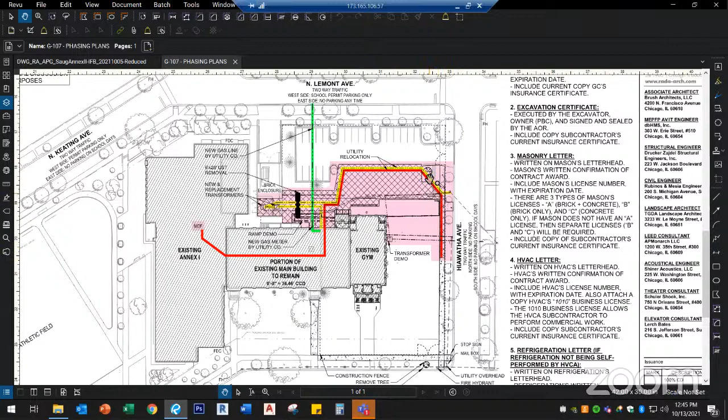milestone 2, which is the portion of the building interior renovations, mechanical system upgrades, and associated work, must be done by August 5th of 2022. The reason is August 5th of 2022 is we're going to have children back in this building and teachers back in this building for the next school year. We have to get all that summer critical work done. So please keep that in mind of the durations and timeframes for milestone 1 and milestone 2.

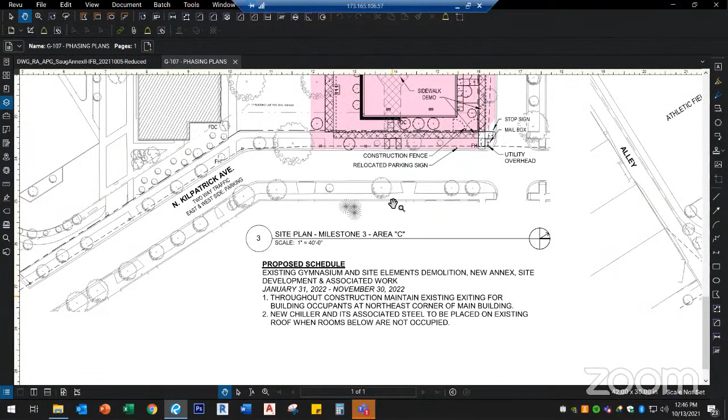Substantial completion will be the bottom left on this. Substantial completion is all work throughout the project. That is the exterior renovations, that is the new building itself, that is the interior remodeling. We have a substantial completion of November 30th of 2022. As you are looking at this and working through your subcontractors and your plans, please keep in mind of these dates. These are hard dates and they will not be missed.

There's additional information on the phasing plan of what is required for all of the certifications and letters to get the permit. Please keep that in mind. Once notice of award goes out, these are all pieces of information that must be submitted within 2 weeks of the notice of award. Very, very clear on here. That is going to help affect the duration and time for the building permit.

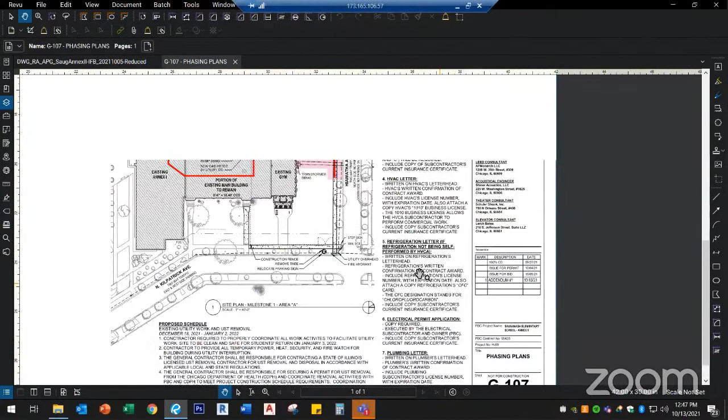That concludes my portion of this, but please keep in mind, this is an extremely important page. Look at this in detail and understand the dates. These dates cannot and will not be missed.

Is there anything else from development? No, thank you very much. Okay, are there any questions? I think I captured the one in the chat. Are there any questions from any of our pre-qualified GCs or subcontractors or potential joint venture partners?